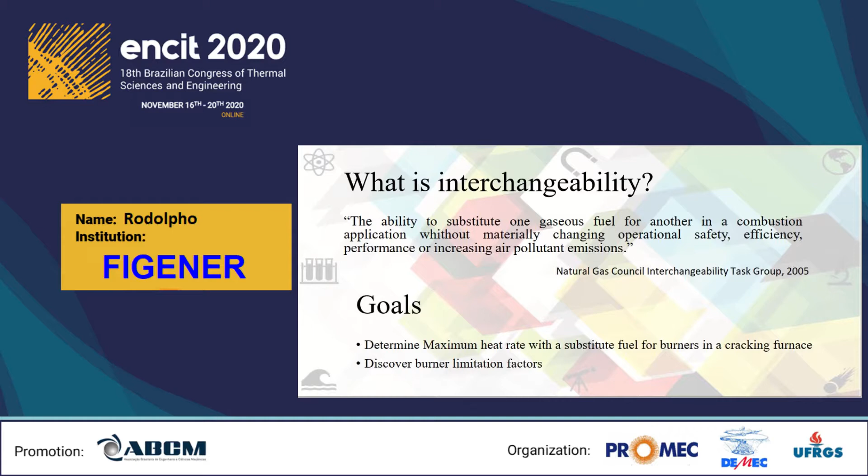A relevant chemical reaction in petrochemical industry is the cracking of naphtha into unsaturated hydrocarbons. Naphtha is fed in the coils usually centralized inside the cracking furnace, where the process temperature is controlled to about 900 Celsius degrees and the furnace temperature is about 1100 Celsius degrees. An important characteristic is the homogeneous temperature profile to avoid hot spots which can produce coke fouling inside the coils. A set of cracking furnaces may have hundreds of burners, including ground burners and wall burners.

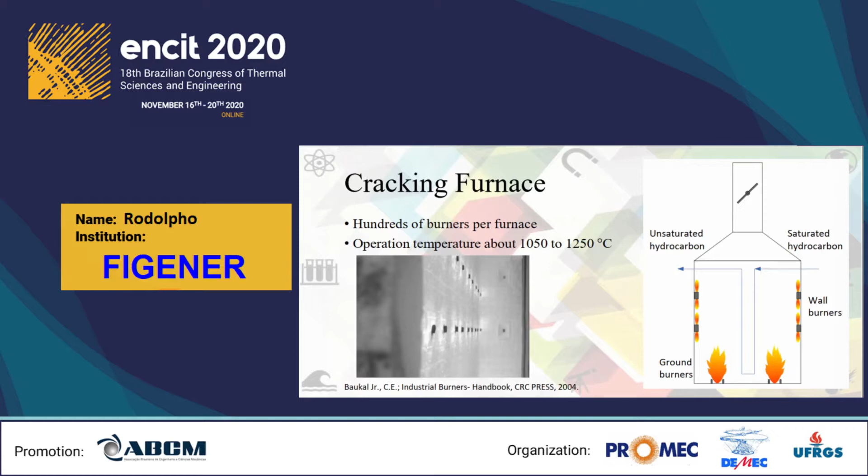Those burners are commonly of premixed type to avail the fuel pressure coming from the off-gas process to entrain the combustion air. This paper will treat about wall burners, so it's worth introducing the burner features. The premixed radiant wall burner has a flat flame responsible to heat furnace tiles, which will irradiate heat to the process coil. The flame begins right here in front of the tip burner.

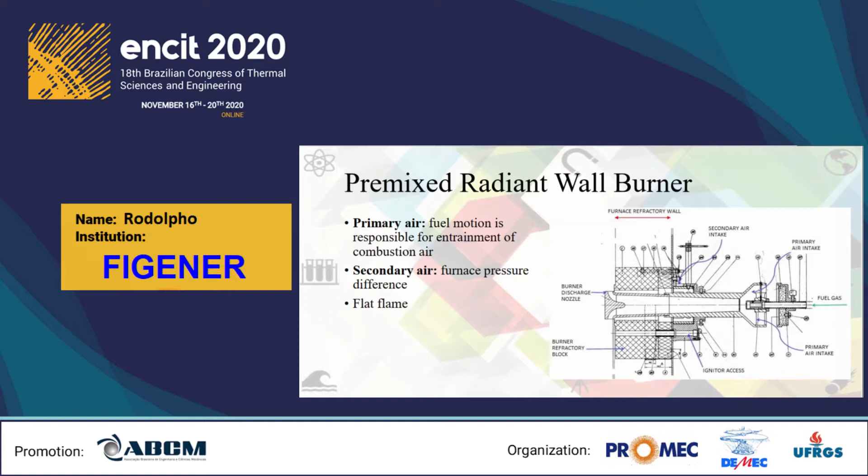The air for combustion is provided by two manners. Primary air is a result of entrainment caused by fuel jet motion inside venturi and corresponds to the main source of combustion air. Secondary air is used to complement the primary air for combustion necessity to fine-tune flame stability.

Wobbe index is calculated as the ratio of higher heating value and the square root of specific gravity. But here it's used a modified Wobbe index calculated with lower heating value, because the cracking furnace does not involve water condensation in flue gas.

Now it's easy to verify Wobbe index correlation with burner heat rate and associate its importance for interchangeability. Wobbe index is perhaps the most popular criteria for interchangeability and is used as a reference in standards for natural gas in many countries, like those in the table.

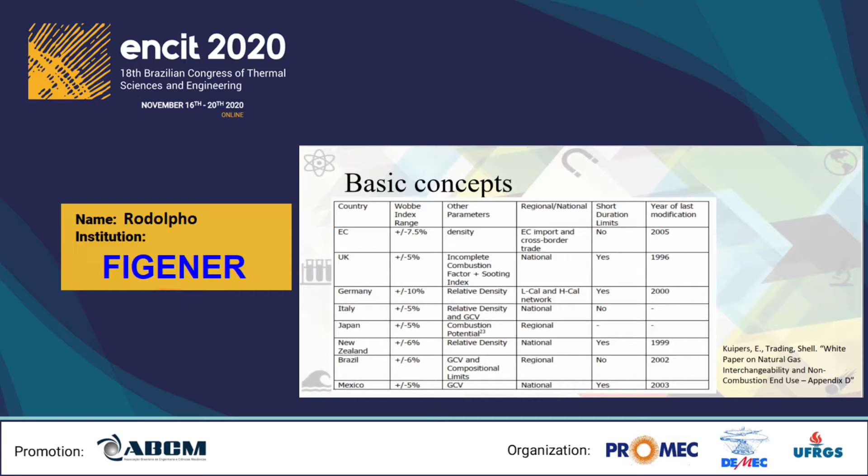The Wobbe index range adopted by the standards are equal or very similar to the value of 5%, used as a reference for interchangeability criteria.

Oxygen concentration in flue gas was adopted as 2% dry and volume basis for cracking furnace safety operation. Furnace pressure has different values as a function of the row of burners, and they were considered -7 mm of water column for the lowest burners row and -5 mm of water column for the highest one.

The internal geometry of the mixing tube was obtained through measurements, and the picture here demonstrates the slice done to separate the mixing tube and tip for more accurate measurements. The validation of the model is based on experiments previously made in a combustion laboratory. CFD modeling was used for primary air, and the secondary air had a different approach using pressure drop coefficients.

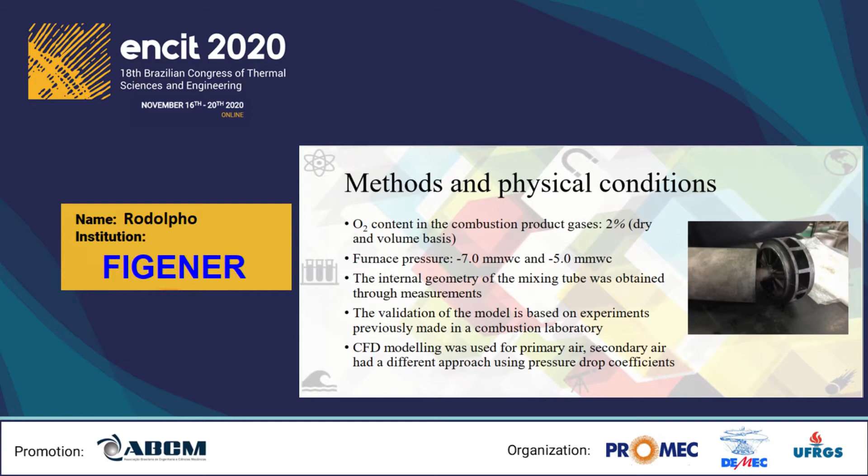Looking at fuels data, in specific the molecular mass, we may associate fuel 1 to a natural gas with hydrogen content and fuel 2 to a liquefied petroleum gas. Since they are from different fuel families, we can already suspect the interchangeability even before looking at the Wobbe index.

The lower heating values in mass basis are a little bit similar, but in volume basis are very different due to molecular mass. This fact has a huge impact on Wobbe index, making the index variation greater than 35%.

From this evidence, we can determine that those gases are not interchangeable by Wobbe index criteria.

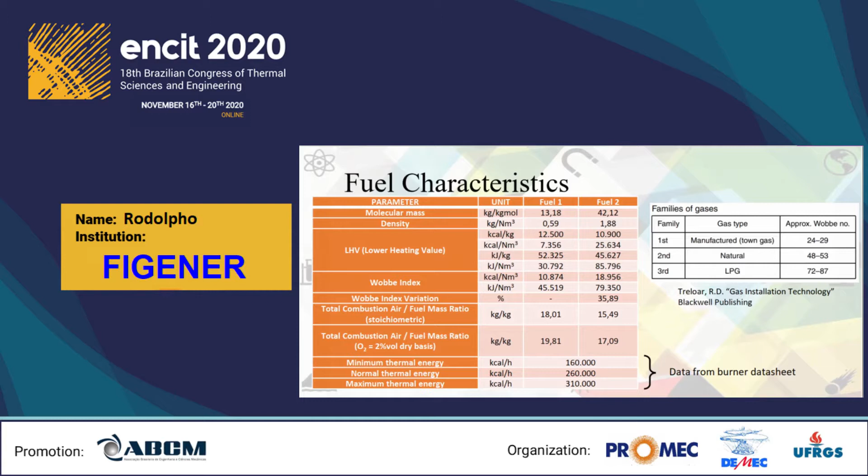The burner is a premixed wall radiant burner with a removable muffler in pink. The nozzle is brown, which has 3 orifices with diameter of 2.8 mm. The burner tip is yellow and in red there is the mixing tube.

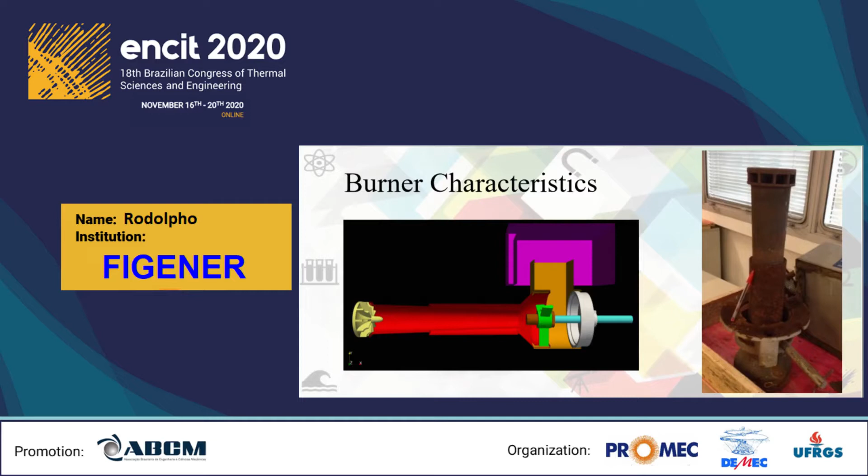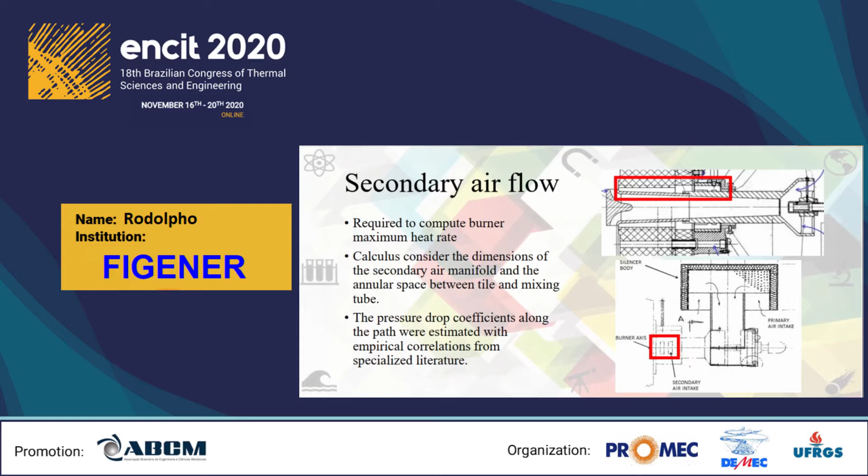The 3D model does not include secondary air intake in the burner tile because it's not part of CFD. Secondary airflow is required to compute burner maximum heat rate. So to model it, we consider the dimensions of annular space between tile and mixing tube and the adjustable intake opening.

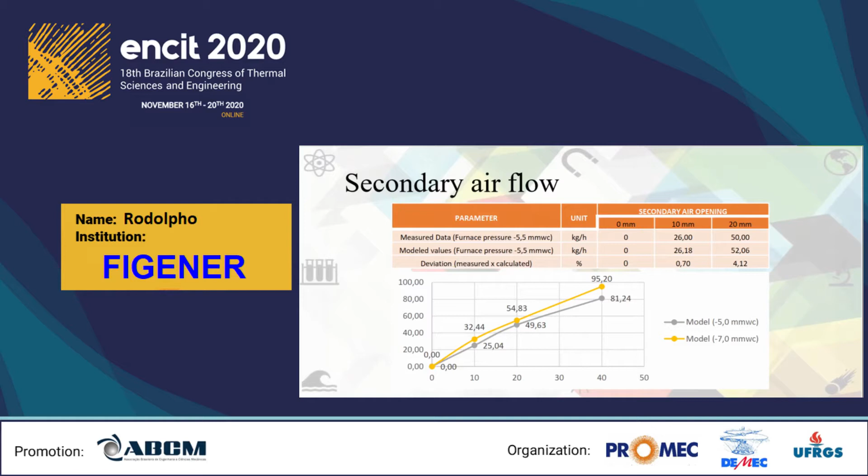The previous mixing of the fuel gas with the combustion air is the result of the interaction process between fuel gas jets and entrained primary air. This momentum transfer is a function not only of physical-chemical properties of fluids, but also the geometry of the Venturi and fuel nozzle. The primary air flow is dominant in the combustion process, and a mistaken ratio of primary and secondary air can lead to flame instability, for example, flashback.

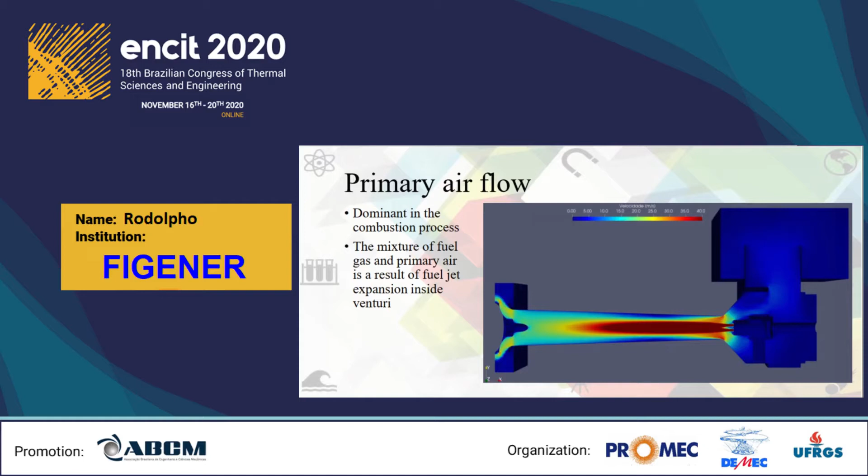Navier-Stokes and continuity equations are solved for compressible fluid, without any chemical reaction and heat exchange. Also, the ideal gas assumption was used. There were tested 4 turbulence models: standard K epsilon, RNG K epsilon, K omega, and SST K omega.

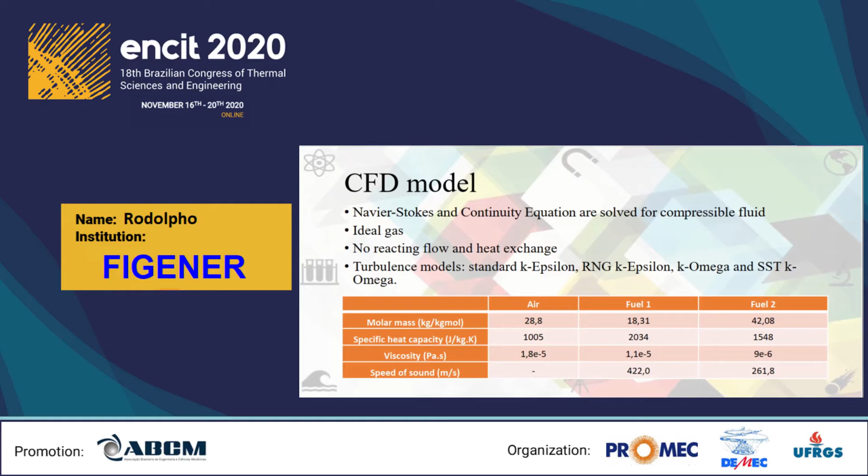The table contains the physical properties necessary for the CFD simulation, and in special, the speed of sound was used to determine the boundary conditions in the nozzle orifice. Pressure at primary air intake and furnace are independent of fuel flow, but pressure at nozzle orifice is not.

So the procedure to determine the orifice boundary condition is: first, calculate fuel density with 101 kPa and fuel manifold temperature. Then, given a mass flow, calculate speed. Finally, compare calculated speed with speed of sound at the same temperature.

If the answer is no, static pressure is set to 101 kPa and speed is set to the calculated value. If the answer is yes, set speed to speed of sound and set static pressure to the value that results in the density needed to achieve the desired mass flow. This procedure is necessary because the nozzle interior is not being modeled. The domain begins in front of nozzle orifice discharge.

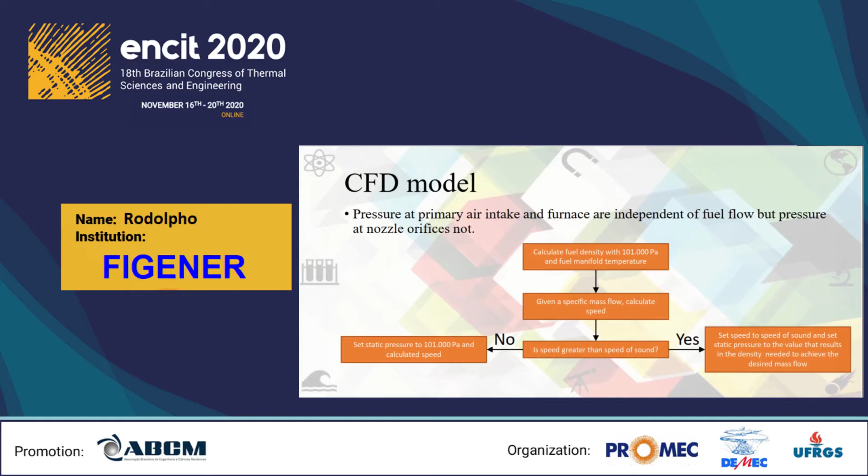All the meshes tested in the CFD were hexa-dominant, and the final mesh had 900 K elements. Time and RAM memory were a limited resource, so the mesh should have the minimum elements as possible, and some simplifications for the fuel injection were done.

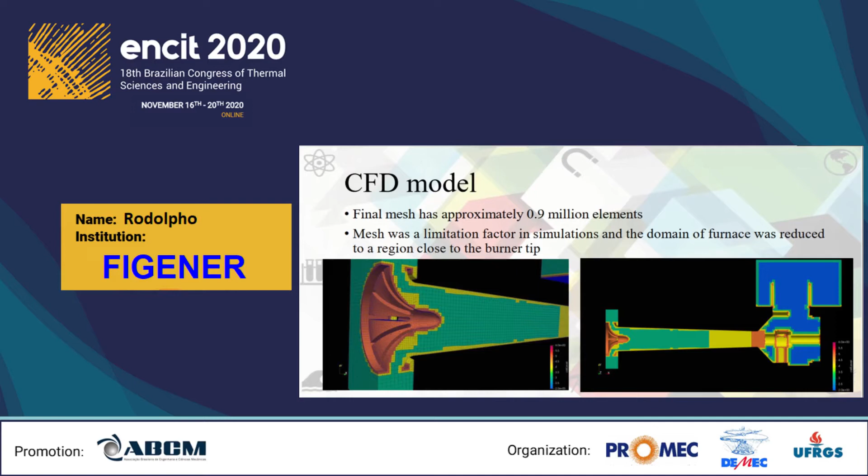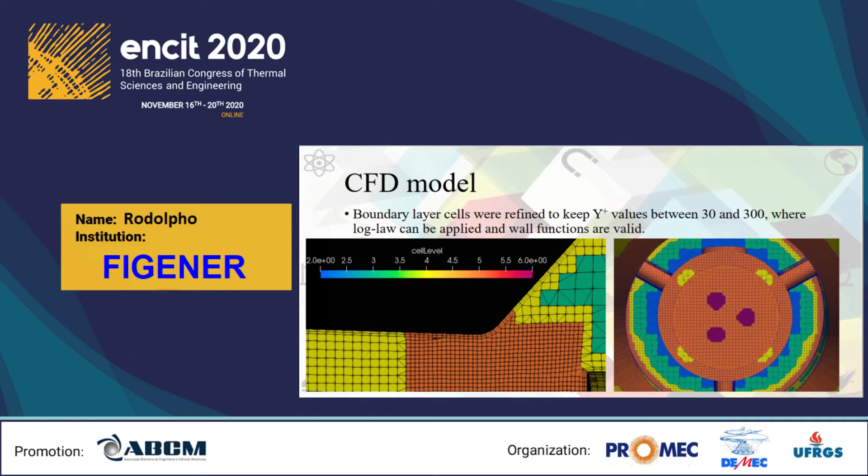Boundary layer cells were refined to keep Y plus values between 30 and 300. But why those values? It's because log-law can be applied and wall functions are valid in this range. Here we can take a look on the refinement necessary to describe orifice.

We used wall roughness to fine-tune the model to experiments because of rust and burners wear after decades of operation. The wall function called nutkRoughWallFunction, changes the value of nut at the wall according to the wall roughness. This wall function is based on 2 parameters, Ks and Cs, where Ks is the sand grain roughness height and Cs is the roughness constant.

Cs is similar to a shape factor, and when it is 0.5, the roughness height is constant, and when it is between 0.5 and 1, corresponds to a non-uniform roughness. A complete mathematical description can be found in OpenFOAM user guide.

The final result is the increase of shear stress and pressure drop across the burner, reducing the entrainment effectiveness when compared to traditional wall function for a smooth wall. To tune the model, Cs was kept at 0.5 and Ks was varied manually till the value of 800 micrometers using the standard K-epsilon turbulence model.

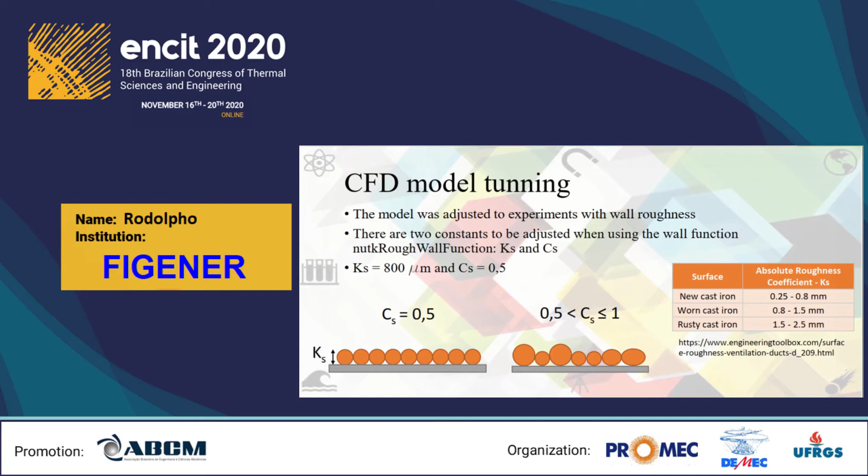Comparing this value with the data of cast iron absolute roughness from the website Engineering Toolbox, we verify good agreement. The fuel used in experiments was natural gas with no secondary air and furnace pressure at -5 mm of water column. In the first experiment, the muffler was removed and the result for primary air fuel ratio was 14.6 against 14.5 of the CFD model.

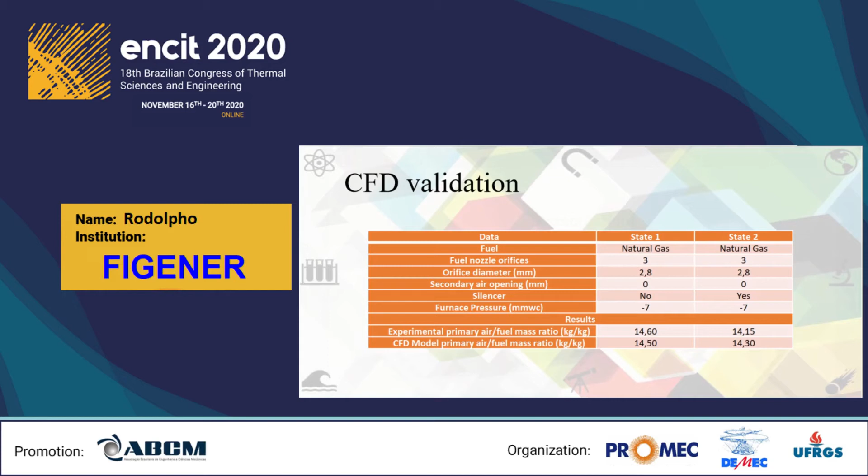In the second state, the muffler is installed and the experimental result is 14.15 against CFD's 14.3. Those values from the CFD model were considered well-tuned and correspond to the accuracy needed to go ahead with more simulations.

This graph summarizes the results obtained from air fuel ratio for fuel 2. To achieve the maximum heat rate, the secondary air opening was the largest, and the result for the condition of 2% oxygen in flue gas is -5 mm of water column in the furnace, and was 13.3 kg per hour, producing 145 megacalories per hour, which is around 50% of the maximum heat rate declared by the manufacturer.

Now we have answered our first goal. We should try to discover the reasons this result is so much smaller compared to the original maximum heat rate, and propose simple changes in nozzle assembly to increase the heat rate.

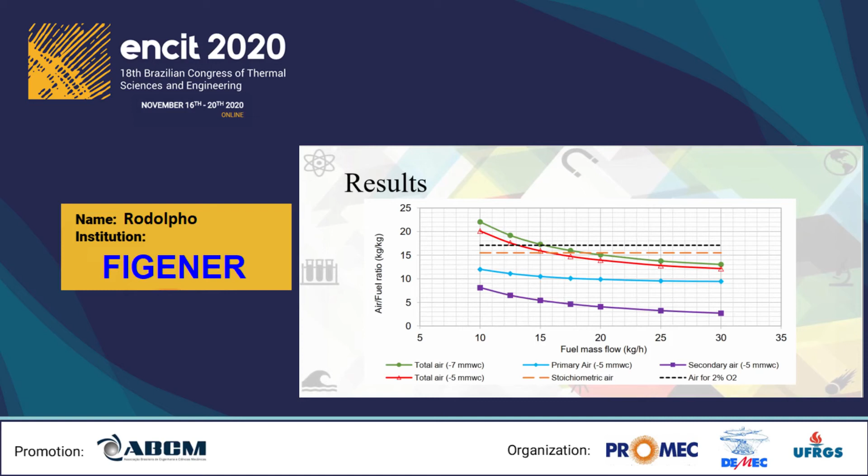We are not considering changing the mixing tube because the venturi is a huge and cast component, so the changes applied to it should take too much effort and could be compared to buying an entirely new burner.

All the conditions were the same and the fuel rate value is kept at 12.5 kg per hour for all the changes proposed. The first attempt to increase the air entrainment was to change the distance between the venturi's throat and the nozzle.

Negative values of increment represent distance reduction. We are able to verify that this distance showed a non-representative increase in primary air entrainment. If we had reduced the distance even more, the nozzle would interfere negatively in the fluid flow inside the venturi's throat, because the passage would be restricted by the presence of the nozzle body.

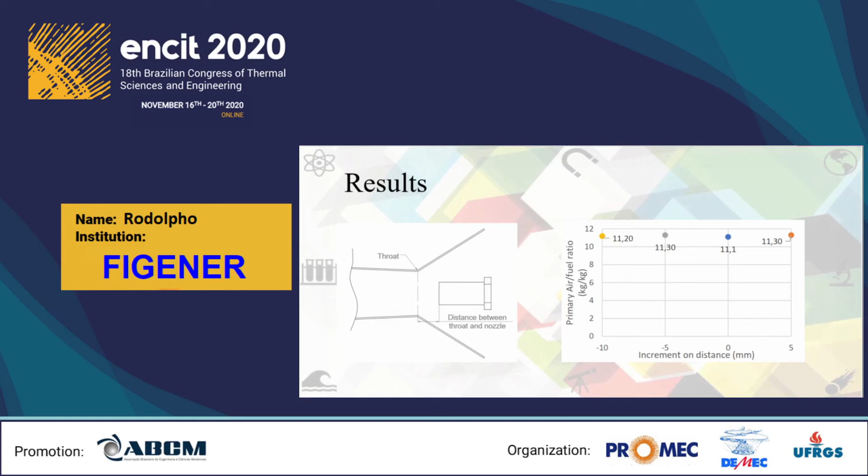The second attempt is the number of fuel orifices. They were changed keeping the same orifice area as the original nozzle. The greater the number of orifices, the larger the area between the fuel jet and the entrainment air. But the simulations showed no expressive impact on the primary air fuel ratio, ruling out the possibility of fuel contact area for jet momentum transfer.

The distance from the center axis is this radius containing the orifice. This distance makes the fuel flow wider through the throat, occupying more peripheral area, but the results show practically no improvements in primary air entrainment.

From the graph on the right, we can verify that decreasing the orifice diameter, we expect an increase in primary air entrainment. Then, keeping the assembly of 3 orifices, the diameters were reduced to improve primary air entrainment.

Looking at the simulation result, we can observe on the left side graph an increment in total air when the diameter is reduced, which was already expected, but those diameters were not enough to achieve the fuel 1 original heat rate.

From the diameter of 2.8 mm to 2 mm, the orifice area is almost halved, and we could still simulate even smaller diameters to reach the desired heat rate, but it would require even higher fuel pressures, which implies restrictions outside the burner domain, for example the available fuel pressure.

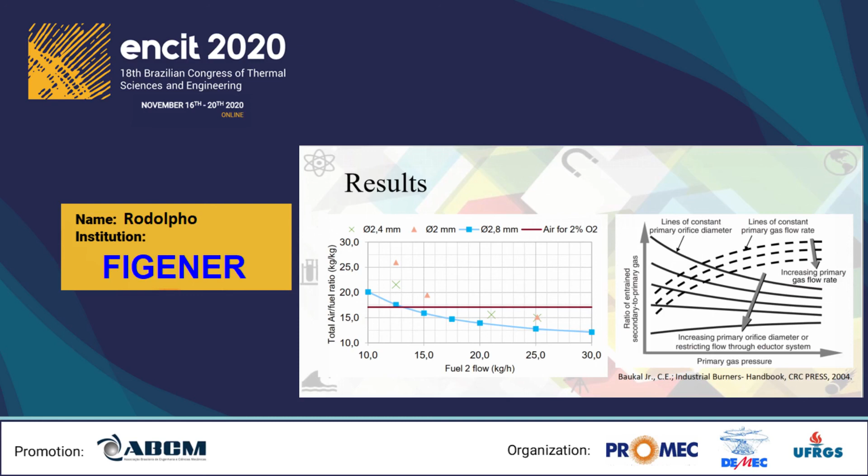Although there are more complex indexes like Weaver and AGA, the Wobbe index method proved to be sufficient to indicate interchangeability without any burner modification.

The concordance of the CFD model with the experimental data and with literature reports proved it to be a precise and potential model to analyze interchangeability and propose modifications to the burner's original project.

The attempts to increase momentum transfer did not make a difference in primary air, so the transfer is not the bottleneck. But when we increase the fuel jet momentum, we got more expressive results, which demonstrates that the geometry and high wall roughness were dissipating too much energy and restricting the air passage, impacting on substoichiometric combustion at high fuel rates.

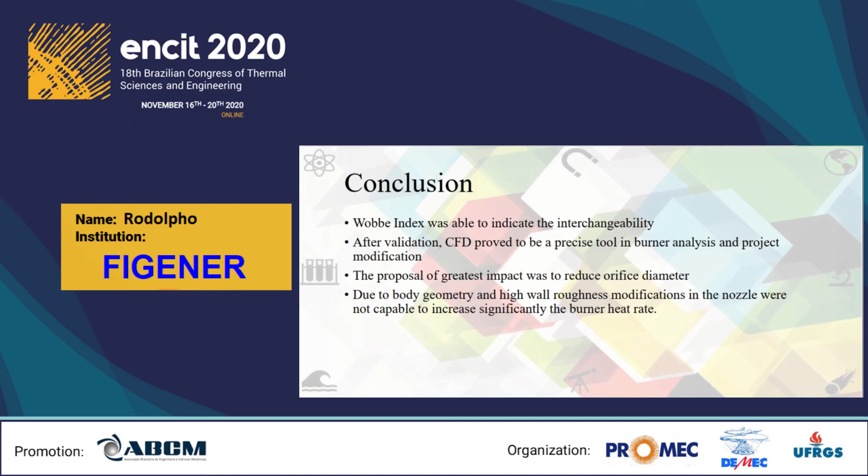The data published in this article are only for the means of illustrating the applied methods.